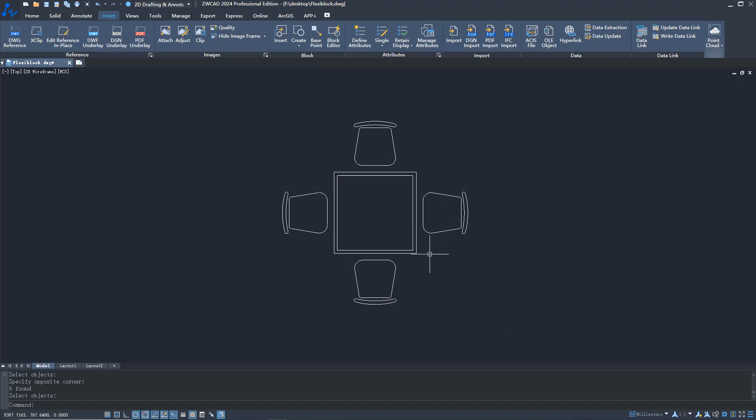Here is a simple guide on how to create a flexiblock. Let's create a stretchable table as an example. Create a regular block object first. Then open the block editor panel and find the parameters and actions buttons.

Let's add parameters first. If you want to stretch the object based on a fixed value, you can set it in the Parameter Properties panel.

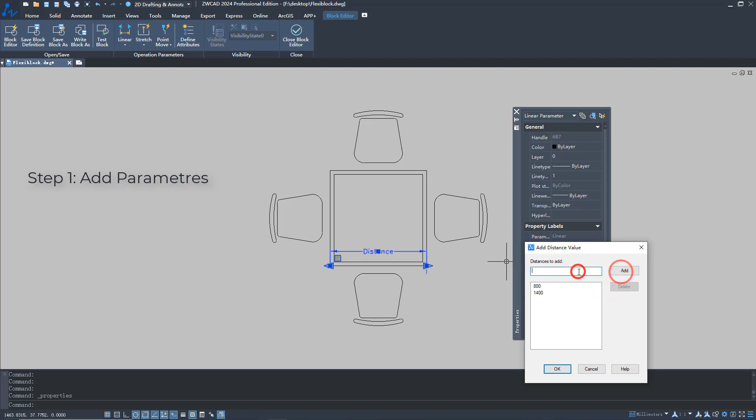Then add actions, select the object you want to stretch, and save the block reference.

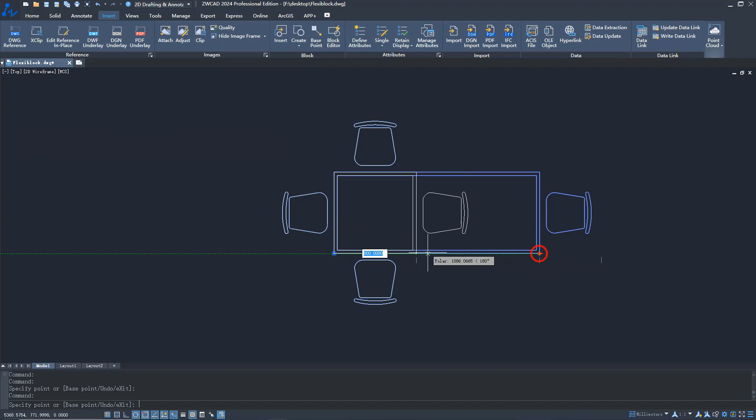You can now see that the block can be dragged freely. However, the number of chairs doesn't change according to the length of the table. We can add the array action to the block.

Now the number of chairs will change according to the length of the table.

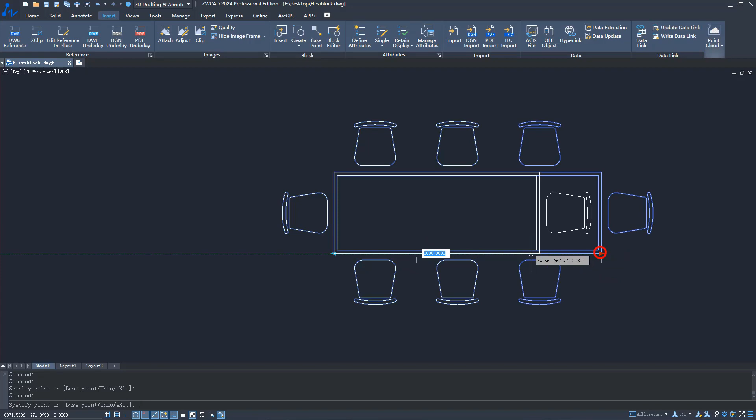Another feature is that dynamic blocks can be edited in ZWCAD now. When we want to edit a dynamic block, a window will pop up to remind you to convert dynamic blocks to flexiblocks. Click Yes to finish converting. Now you can edit the dynamic block in ZWCAD.

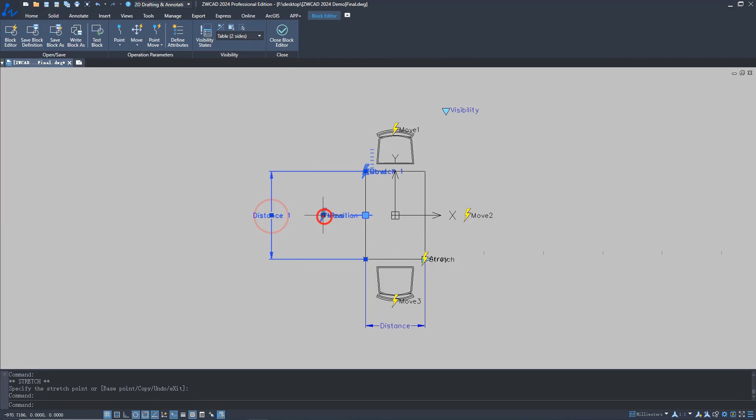And you can add many parameters and actions to it. Interested in the Flexiblock function? Download ZWCAD 2024 to start using it now.